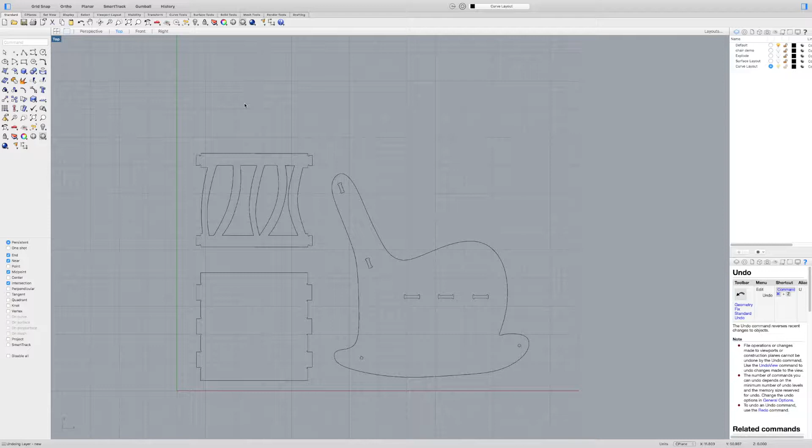All right, this is part 4 of our video series on doing layouts for the CNC router or maybe even the plasma CNC. But in this video, I'm just going to show you how to set up things to lay out on your material. Right now, we've got our curves; they're all grouped nicely. We've got our dog bones and things like that.

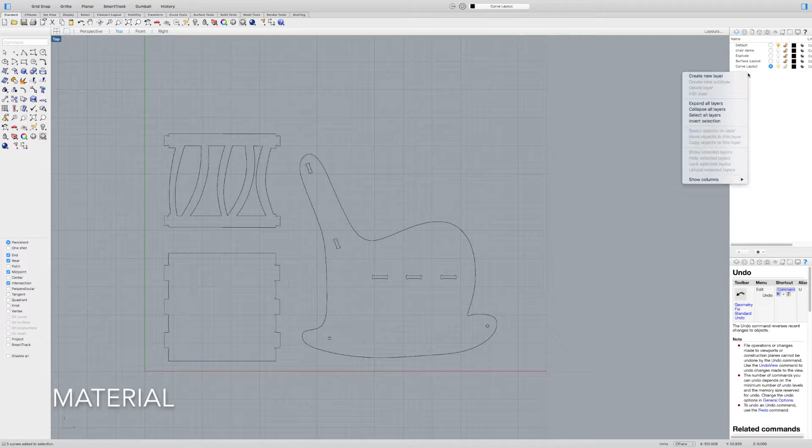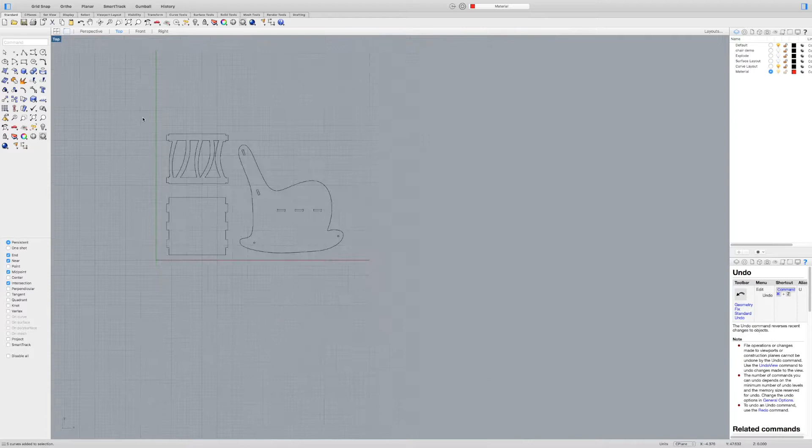So first thing I'm going to do is come over here and create a new layer, and I'm going to call that material. I'm going to select it and change its color just so it's something else. And I'm going to close it out. What I want to do is align everything so it's aligned with the coordinate system.

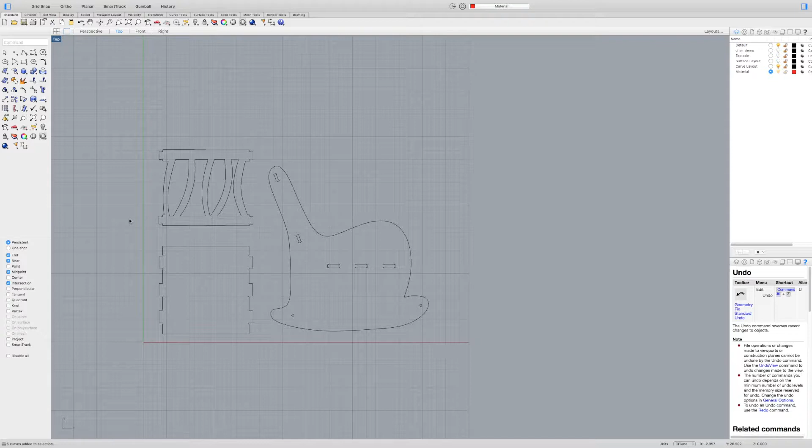Because when I'm using CNC machines, typically they need to home themselves and work off of their own coordinate systems. Sometimes that might be called a work offset or things like that. But just to keep things simple, let's keep things lined up with our coordinate system. It just makes things a whole lot easier to understand. And with our machine, the longest travel is the x-axis. So we want to make sure when we're laying things out, we take note of that.

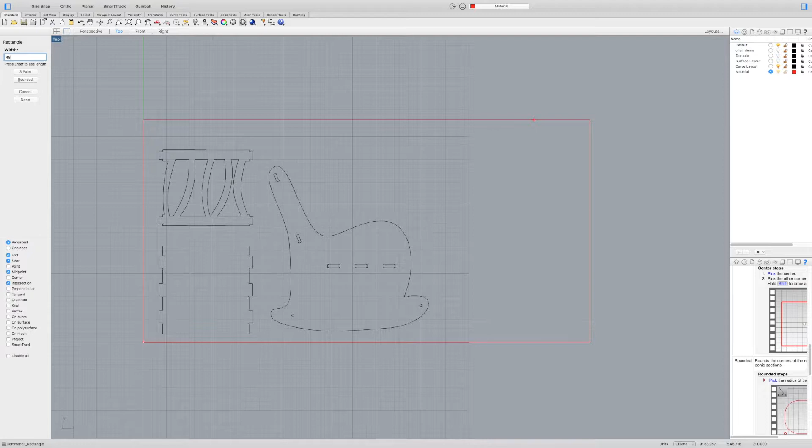So I'm going to come over here to my rectangle tool and make an outline of my material. Like I said before, let's keep it simple, and I'm going to type in 0 so it aligns there. Now I can click a second point, or I can put in my length of my material, which for us is 96, because we're using a 4x8 sheet of plywood, so 96, and then it's 48 inches. So this is good. It's set up the way I want, because this long length is the longest length of the machine.

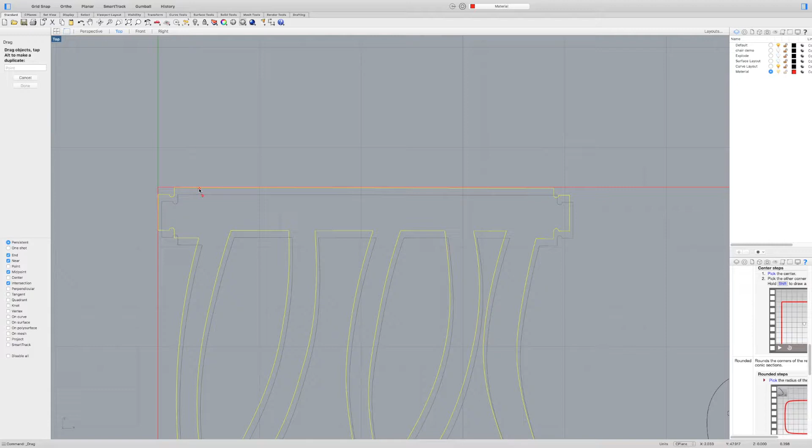Now, one thing I also want to note is I don't want my pieces to get too close to the edge. The CNC router uses a 1/4 inch bit, or maybe even a 1/2 inch bit. It depends on what you're using, but you want to make sure that your bit isn't off the material. So to make sure I'm not going into the danger zone, I'm going to offset my material curve as reference. So I'm going to come over here, offset curve, and I'm going to say 0.75 is a good rule of thumb. I'm going to select this.

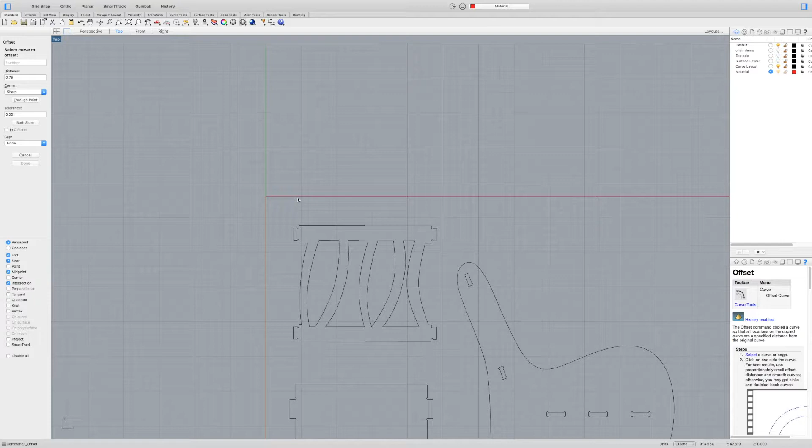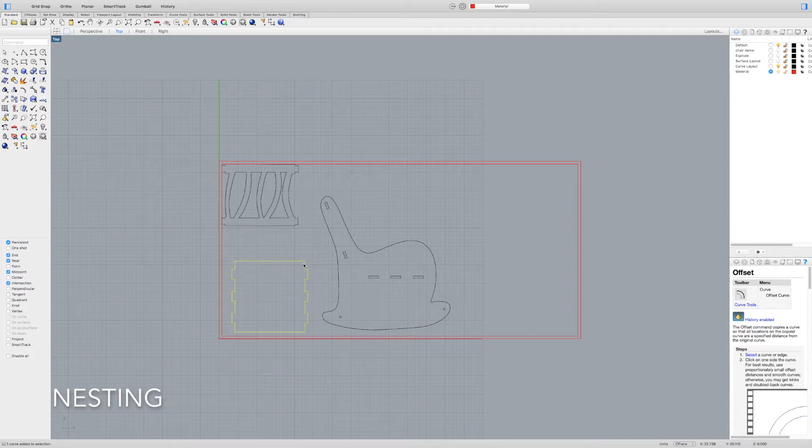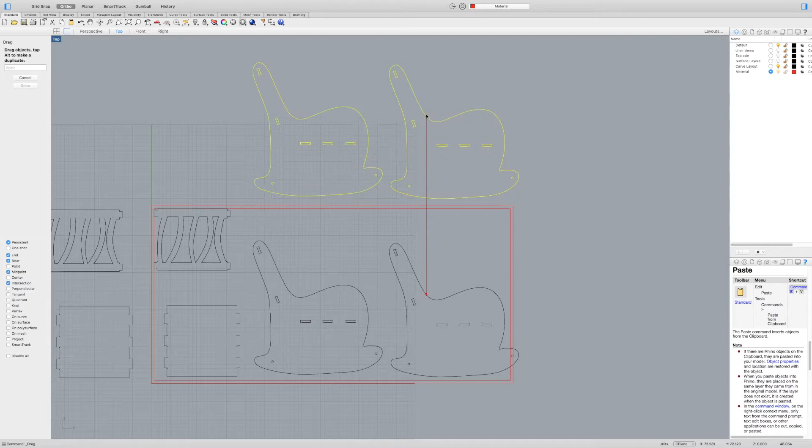Now I can go on the inside or outside. I'm going to go on the inside. So that's the maximum for moving my pieces; that's really the closest I can go. So I'm going to put that guy there, and then I can move my other pieces around and try to get as much as I can out of this. I'm going to copy and paste my lines. I'm going to get 2 sets, so I have 2 chairs. Then I can play around with it from there and rotate these in different ways. This is just going to take some time playing around with them.

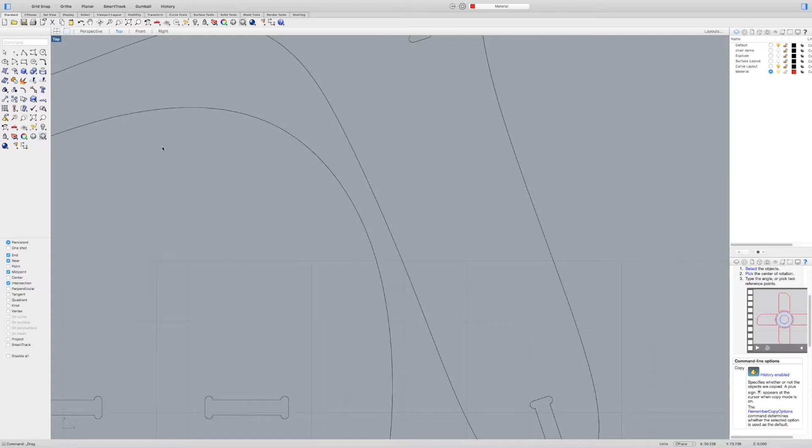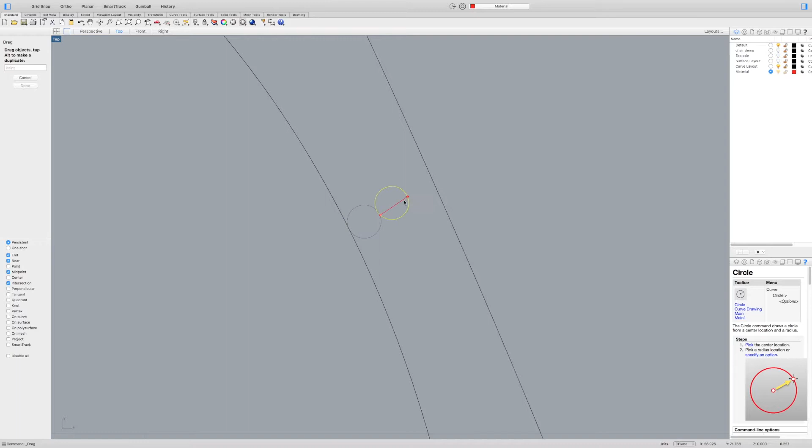Now, one thing I want to be aware of is when I'm cutting this, I want to make sure that I'm at least, again, 3/4 of an inch away. The reason is I don't want to cut away too much material so that these become loose. I don't want them to be 1/4 inch away from each other, because when it comes by, it might even potentially cut into the chair. For example, if I click my diameter tool and click 0.25, that's what my router bit's going to look like. It's going to do the same thing on the other side and cut away that much material. So I want to make sure that I'm away from other pieces.

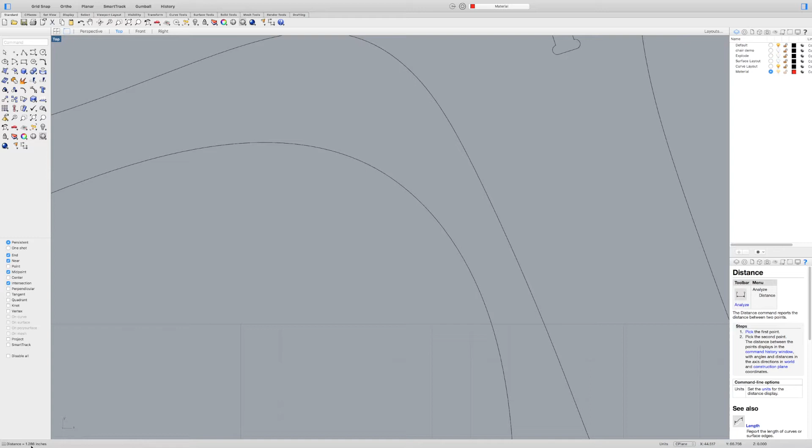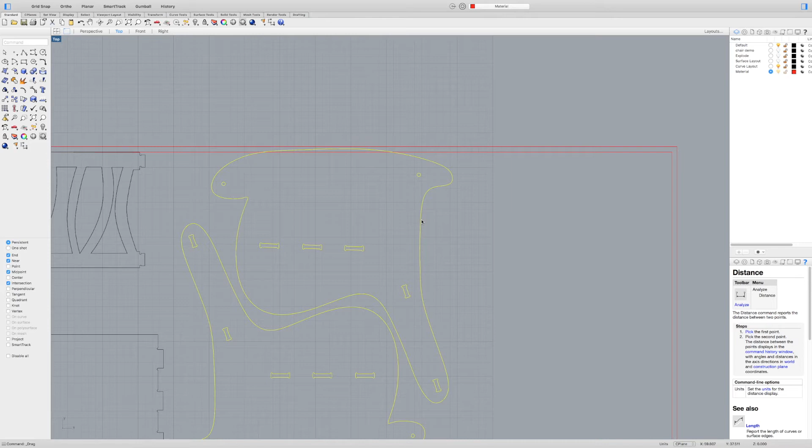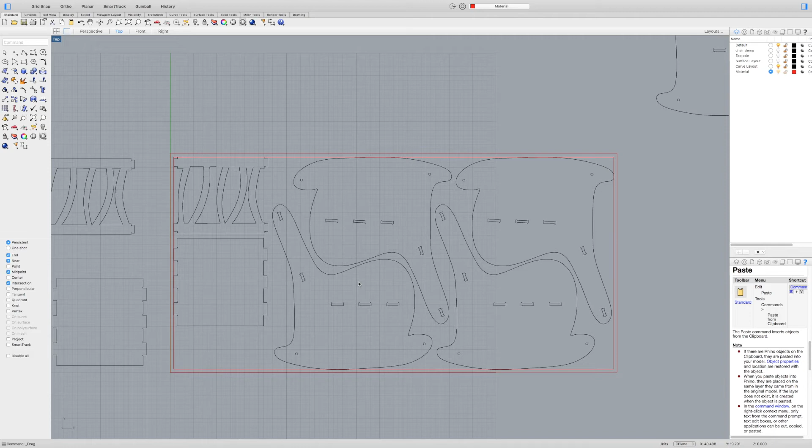And I can do that by coming up here to analyze distance, and I can click point to point and say, where am I? And right now I'm 0.1286, right down here in the lower left corner. Because like I said, 3/4 is really what I would prefer, and I'm living on the edge there. So I'm going to play around with these and move them around. I have some playing around to really try and get 2 chairs out of this. But that's part of the deal.

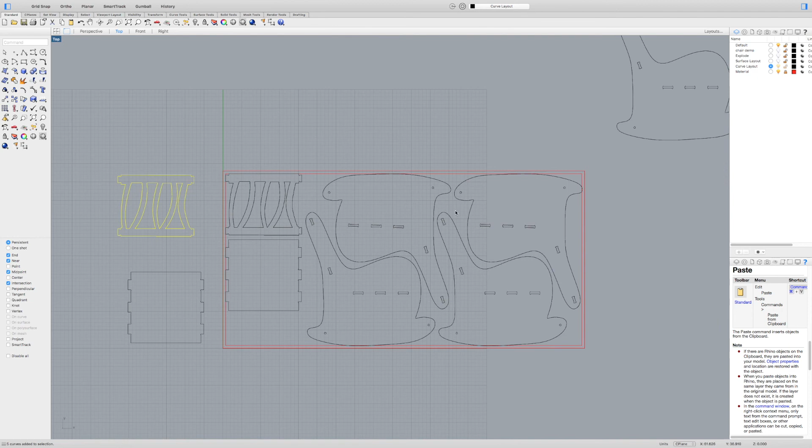And so this concludes where I am with my layout. Once I get this all laid out, I can delete any extra lines. I'm going to go back to my curve layout, and I'm going to lock my materials layer so I can't edit it, so it just stays that way. All right, so this concludes the final video of laying out our pieces for the CNC router. Please watch the video tutorials on how to write your tool paths, and then you can get cutting, flip some chips.